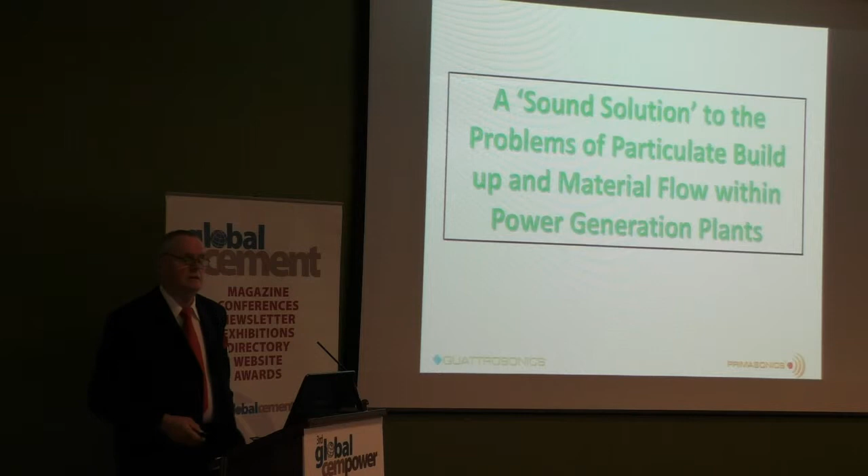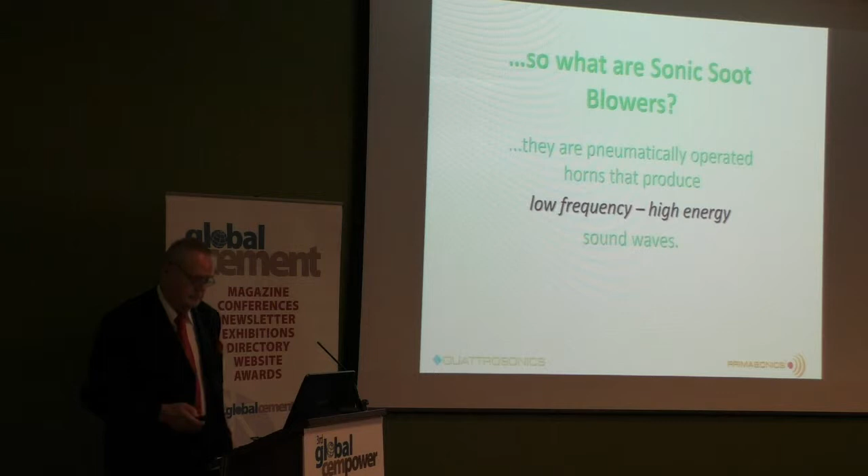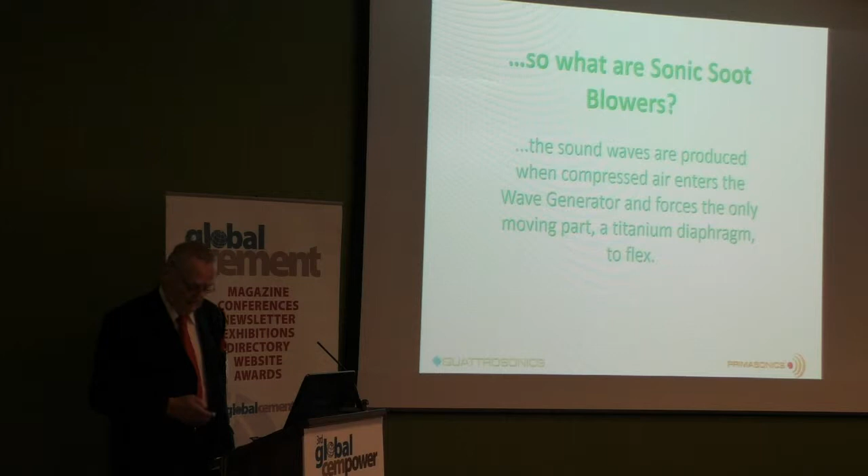My presentation is a sound solution to the problems of particulate build-up and material flow within power generation plants. So what are sonic soot blowers? They are pneumatically operated horns that produce low frequency, high energy sound waves. The sound waves are produced when compressed air enters the wave generator and forces the only moving part, the titanium diaphragm, to flex. Here is a typical sonic soot blower.

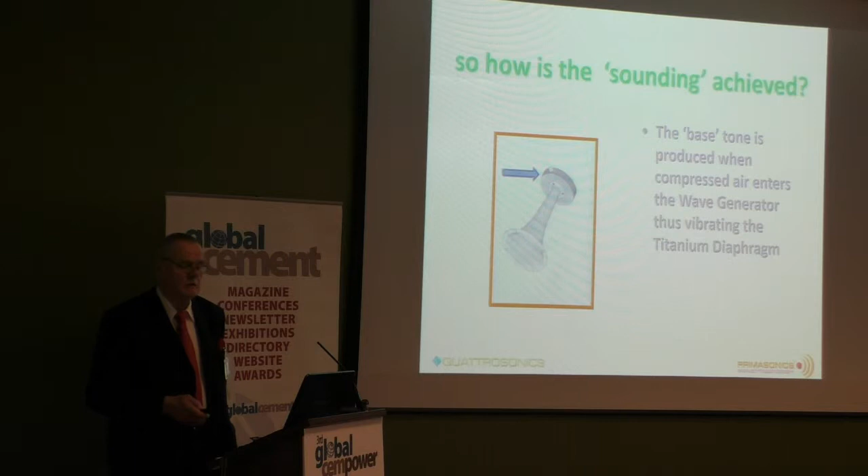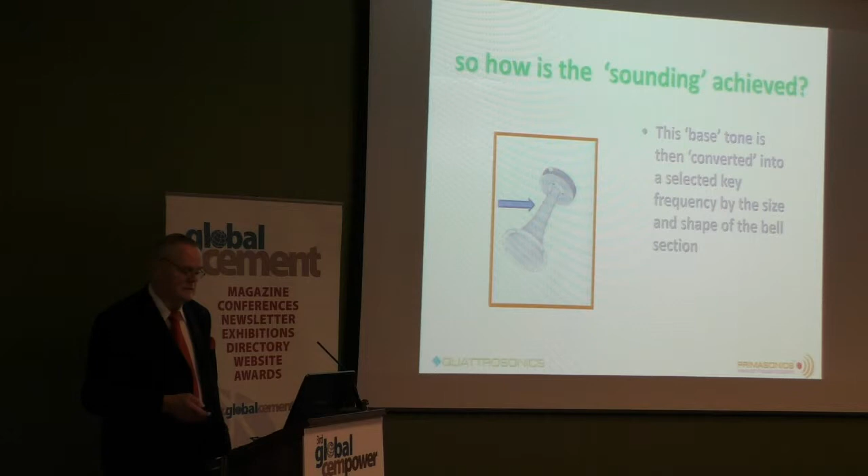The bass tone is produced when compressed air enters a wave generator, causing the titanium diaphragm to flex. That creates a bass tone, and then this bass tone is converted into a number of selected key frequencies by the size and shape of the bell section.

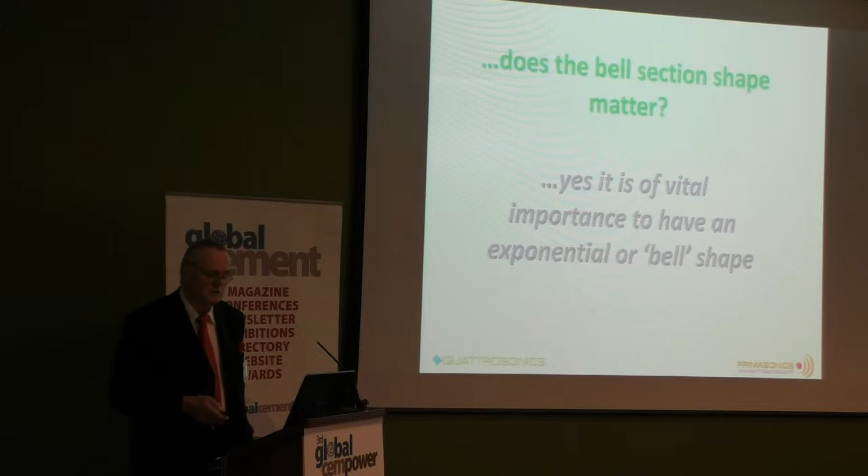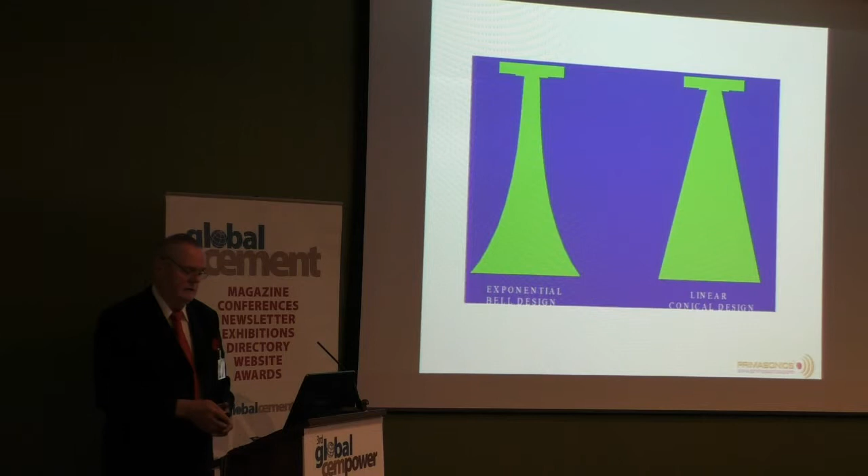Does the shape of the bell section matter? Well, yes, it is of vital importance to have an exponential or bell shape. On the right, you see an easier, simpler, cheaper, linear, conical design. If sound waves were to be emitted from this, they would be emitted as a parallel beam. If you have the exponential shape on the left, they are emitted in a cyclonic effect, giving much better coverage inside the vessel. So what do they do?

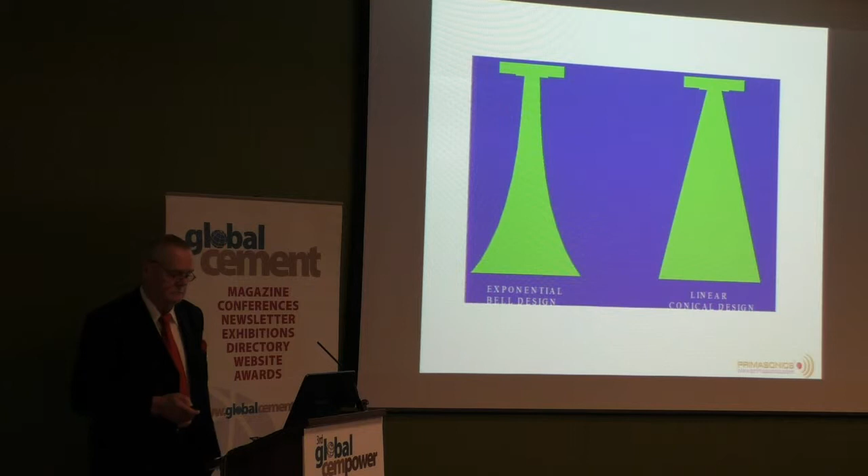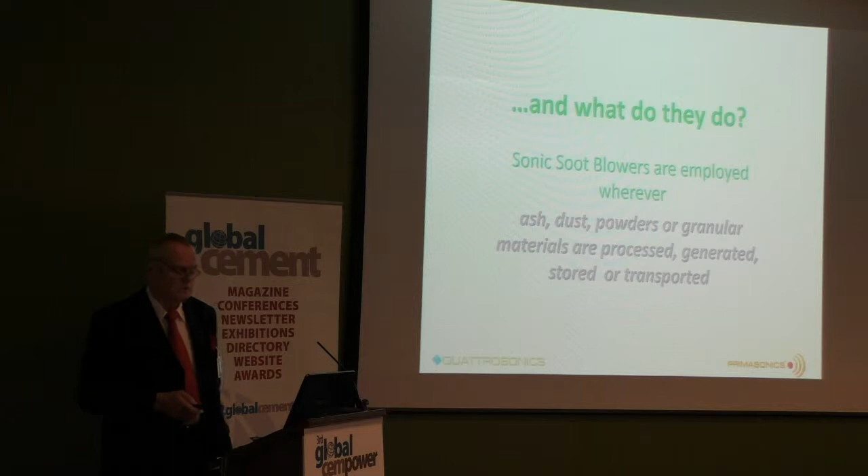Sonic soot blowers are employed wherever ash, dust, powders, or granular materials are processed, generated, stored, or transported.

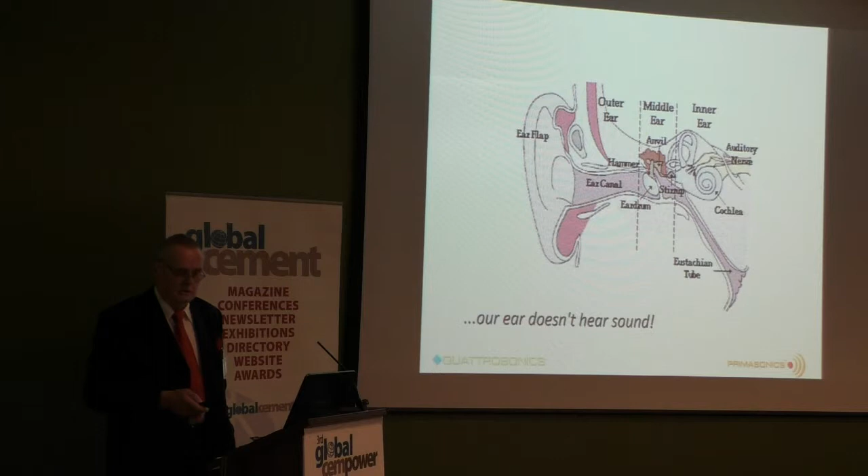To understand a little bit more about sonic soot blowers, first of all we have to understand what is sound. You may be amused or concerned to know that our ear doesn't actually hear sound. Our ear is a pressure-sensitive mechanism that detects very rapid pressure fluctuations. That is why when we fly or swim underwater, our ears go pop - they're detecting very rapid pressure fluctuations.

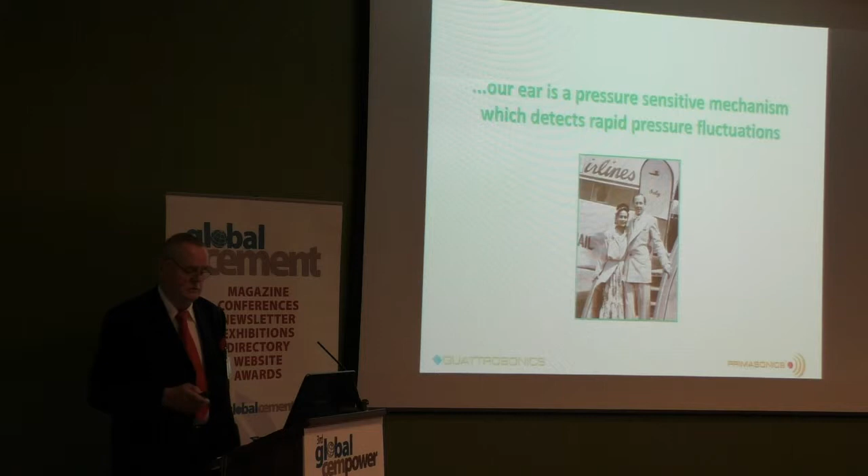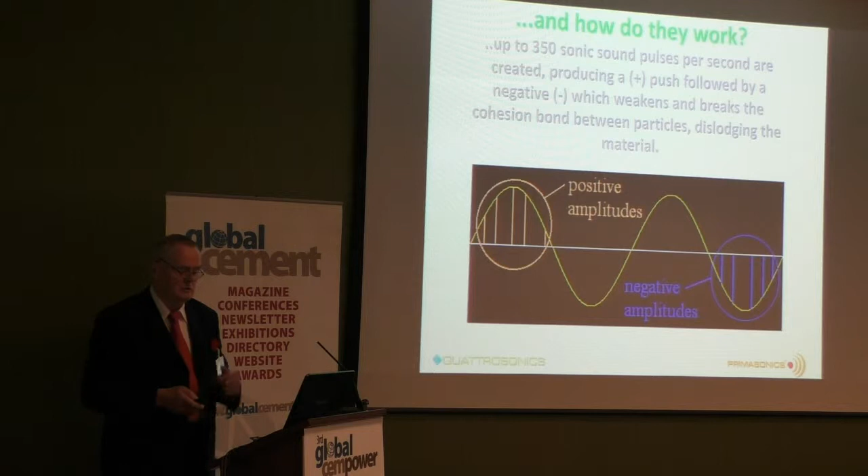That is exactly what is produced by a sonic soot blower - a range of very rapid pressure fluctuations. If you look at the next diagram, you will see that in a 350 Hertz sonic soot blower, there are 350 sound pulses per second. This creates a positive push followed by a negative, which weakens and breaks the cohesion bonds between the particles, dislodging the material. So it's a very rapid push-pull. Here's a typical sonic soot blower waveform.

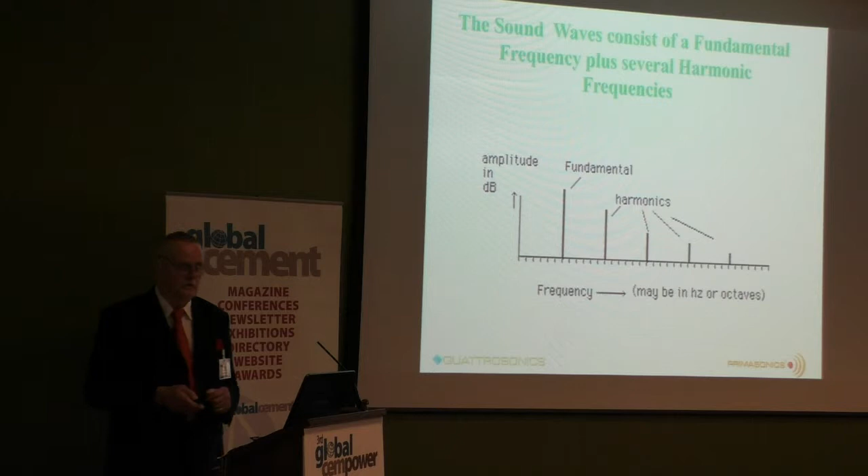Sonic soot blowers, although we direct them towards a particular fundamental frequency which we want to achieve, also produce harmonics - like in a piano, you play middle C, you go up an octave, you play the next highest C. So let's say the fundamental range you want here is 100 Hertz, you'll also get harmonics happening at 200 Hertz, 300 Hertz, etc.

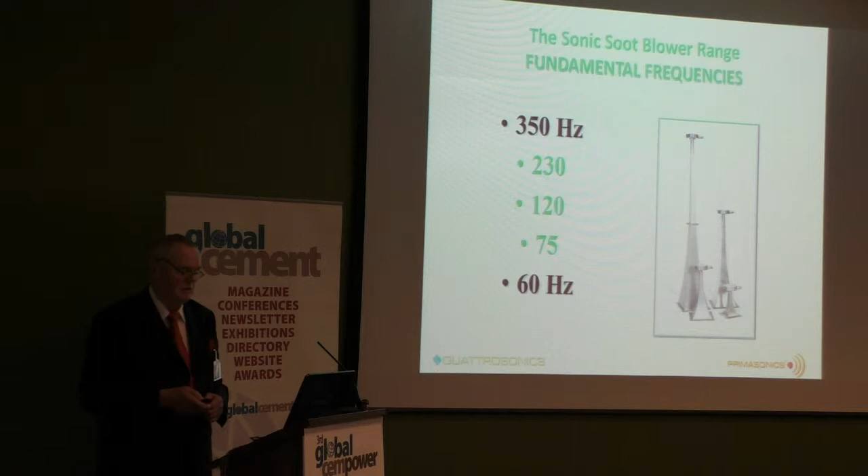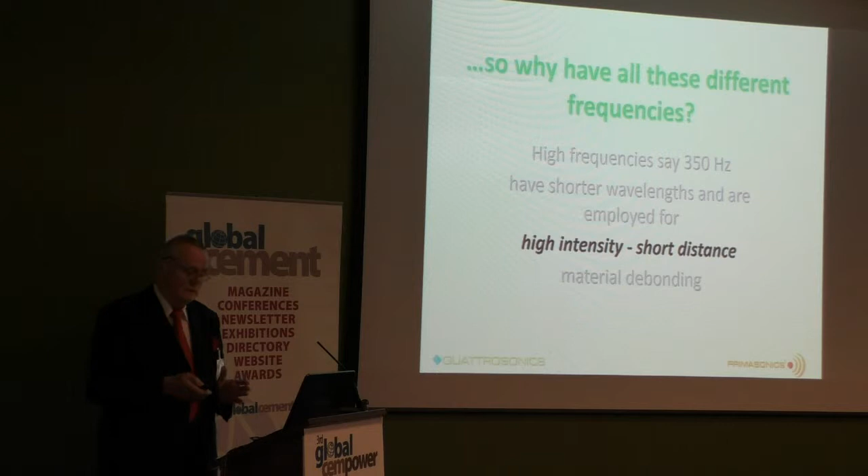With our long experience, we use the following frequencies to cover the wide range of applications. We go from 350 Hertz through 230, 120, 75, up to 60 Hertz. So why do we have all these different frequencies? High frequencies such as 350 Hertz have the same power but shorter wavelengths, and are used for high intensity, short distance material debonding. For example, if you have a silo with a hopper and the hopper is bridging, we would use a higher frequency device because that acoustic power we want used over 1, 2, 3 meters.

The opposite is true as well. The low frequency, for example 60 Hertz, has longer wavelengths and is employed for high power, long distance material debonding. Again, taking a silo as an example, if there was sidewall material build-up, rat holing, let's say a 30,000 ton cement silo, we would install a 60 Hertz unit on top, and that would prevent this sidewall build-up. It's because the sound waves are very long and they will pass up and down that huge silo space.

I'm going to give you a little demonstration of the power of sound waves only.

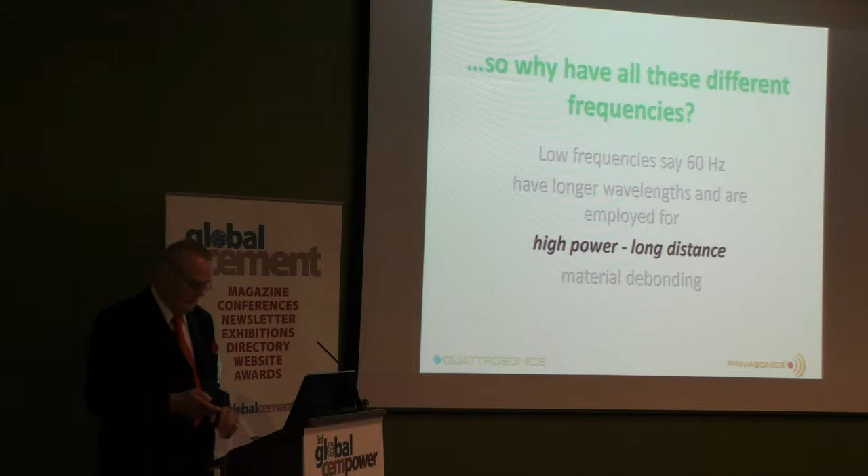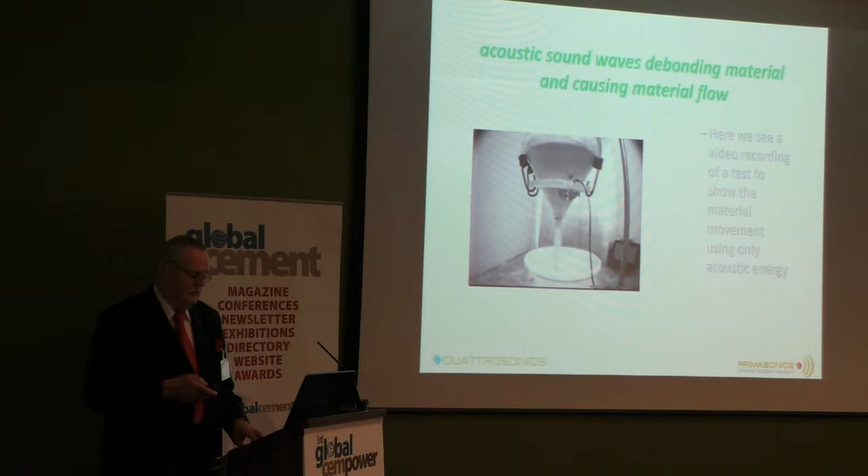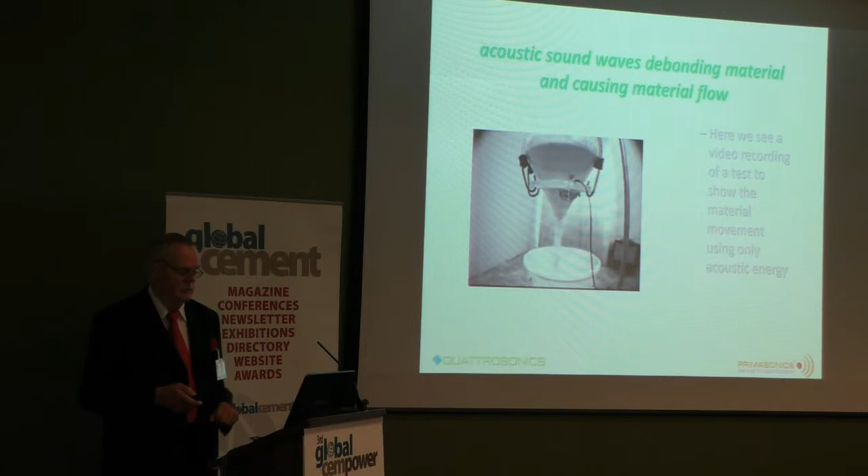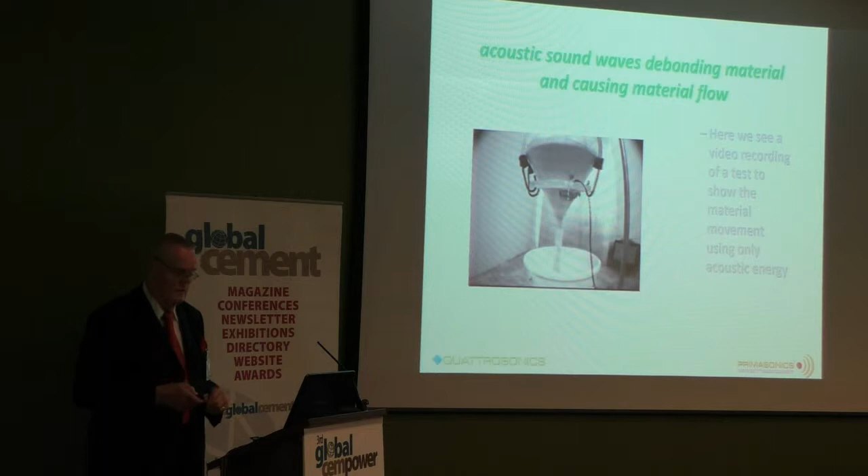We do a lot of research with the University of Liverpool on an ongoing basis. Here is a special room where we have an acoustic cleaner and a vessel, and no other outside influences. This is simply using sound waves - no vibration, nothing else - to make that material flow. Purely sound waves. We have accelerometers strapped on the side of the vessel to measure and prove that there is no vibration happening. A very, very powerful material debonding.

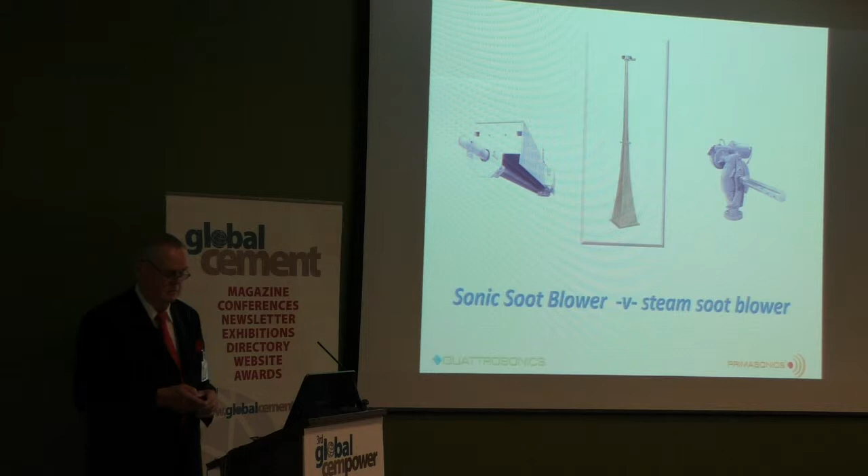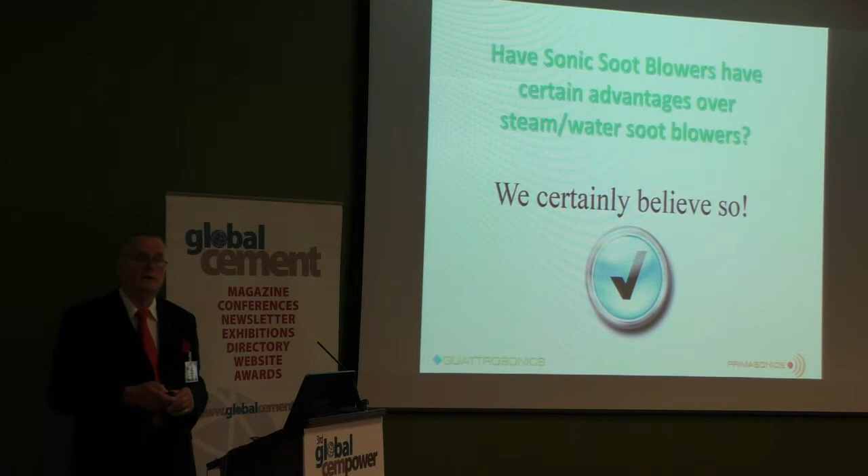One of the key areas we are involved in is the story of the tussle between sonic soot blowers and steam soot blowers. I'm sure many of you are familiar with steam soot blowers, even if you're not yet familiar with sonic soot blowers. So do sonic soot blowers have certain advantages over steam or water soot blowers? Well, we certainly believe so. If you look at a couple of the key areas - first of all, price, operating and maintenance costs - the sonic soot blower is cheaper to purchase and install.

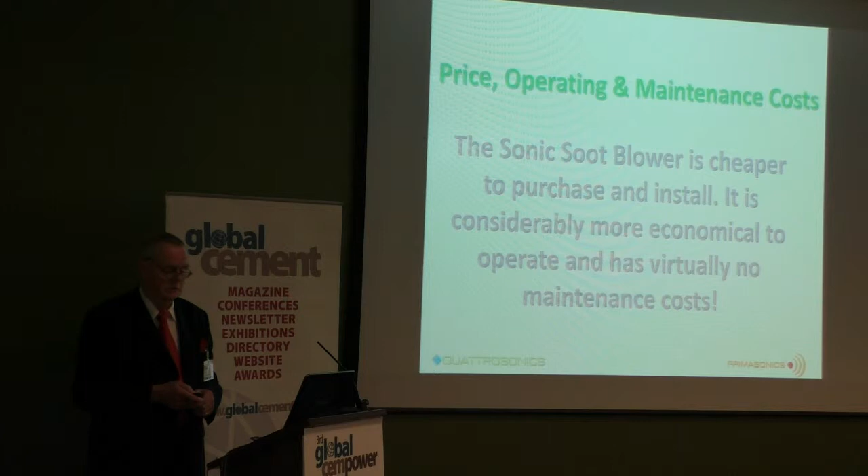It is considerably more economical to operate, with virtually no maintenance costs. Looking at physical damage, corrosion and erosion, the sonic soot blower will not cause any physical damage or vibration to tube bundles or structures. Because there's no steam or water involved, they will not cause any corrosion or erosion problems. So, no physical damage.

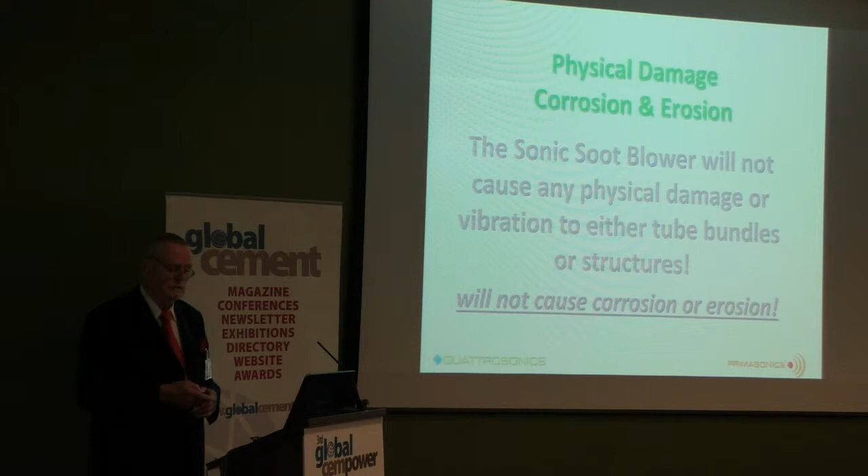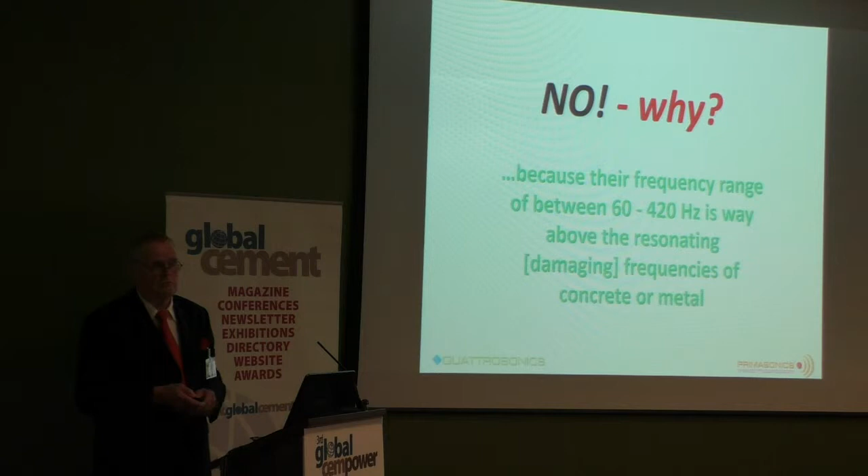Well, can we prove it? The reason is that we operate between 420 hertz and 60 hertz, which is way above the resonance frequencies of steel or concrete. You need to be down somewhere below 15 hertz to start getting into that area.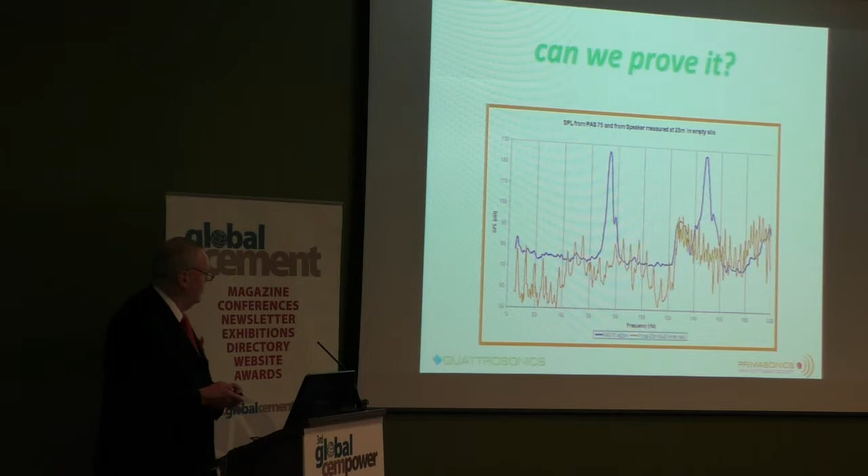Can we prove it? Yes, we can. Here's one example. Here we have a large silo, a concrete silo with a metal base. We installed a microphone halfway down the silo, a 75 hertz unit on top, and a couple of accelerometers on the wall of the silo and the hopper section, and we sounded the unit. Being a 75 hertz unit, its fundamental frequency appears at 75 hertz, and we have the harmonic at 150 hertz.

So all this powerful sonic debonding is going into the material. The orange line is the vibration picked up on the side of the silo or on the hopper. This could be a forklift truck driving by, a rotary seal, or a conveyor on the bottom of the silo - many reasons. But you will see that none of this powerful debonding sonic wave energy is being absorbed into the structure whatsoever. Totally, totally safe.

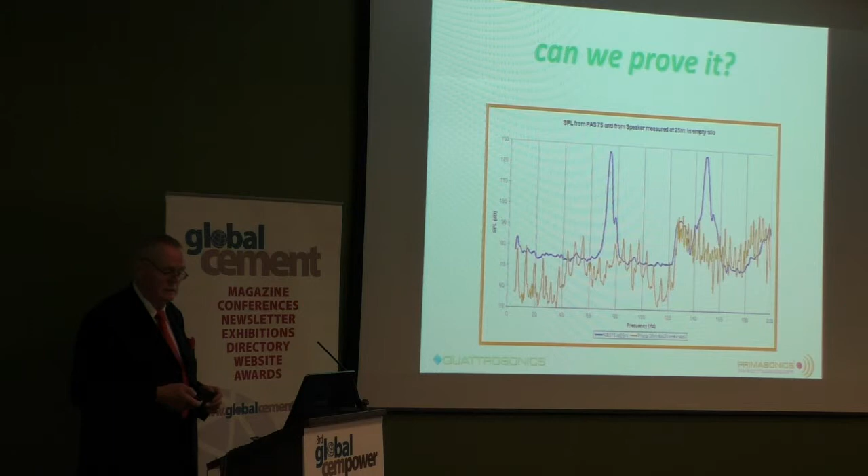Other interesting things about sonic sound waves: they travel at about 344 meters per second in air, faster through solids, and in 360 degrees. So unlike a steam soot blower, it's not just leading tube edge cleaning, but total tube cleaning.

One other important difference between steam soot blowers and sonic soot blowers is that sonic soot blowers actually prevent ash being deposited in the first place, rather than leaving it like a steam soot blower until the end of the shift when you're trying to blast a hard crust off the tubes. So by sounding a sonic soot blower typically for 5 to 10 seconds every 5 to 10 minutes, it prevents the ash from building up in the tubes.

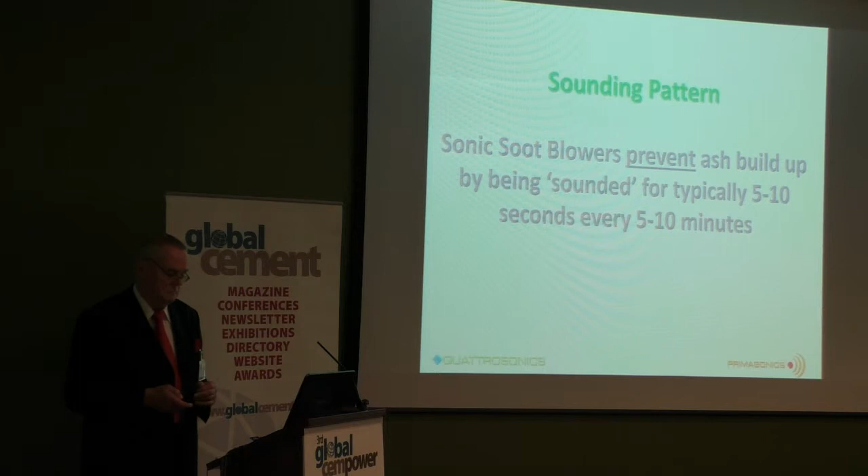So what is required to operate a sonic soot blower? Only two things: normal compressed air, 5 to 6 bar, using about 18 to 22 liters per second when sounding - but remember, it's only sounding for 5 to 6 seconds every 10 minutes or so - and electrical control voltage to activate the solenoid valve. This can be by a strapped-on timer, a plant PLC, or a local PLC.

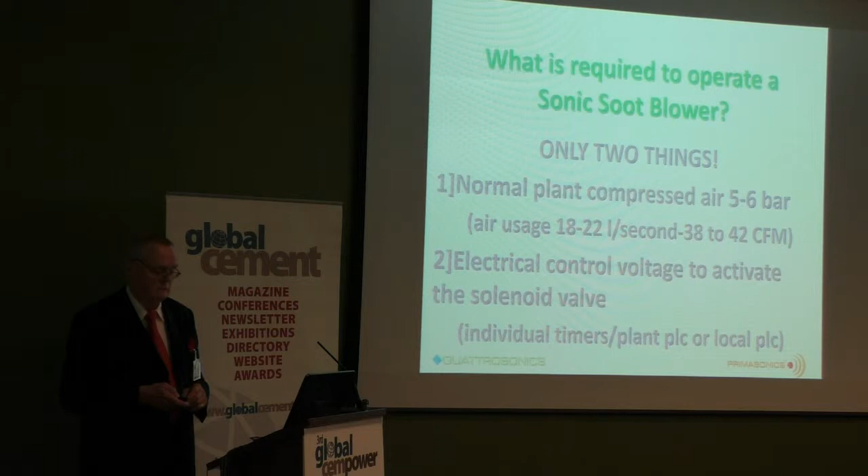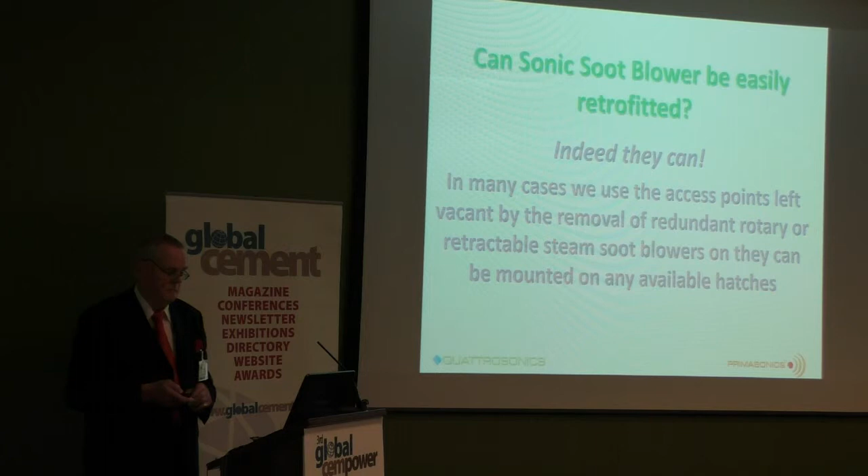One of the questions we're often asked: can sonic soot blowers be easily retrofitted? Well, indeed they can. In fact, a lot of our applications are doing that. We can use the vacant ports left by redundant steam soot blowers, or we can use any hopper or hatch in between the tube bundles, which is ideal for us. So, easy to retrofit. Let's look at a few examples.

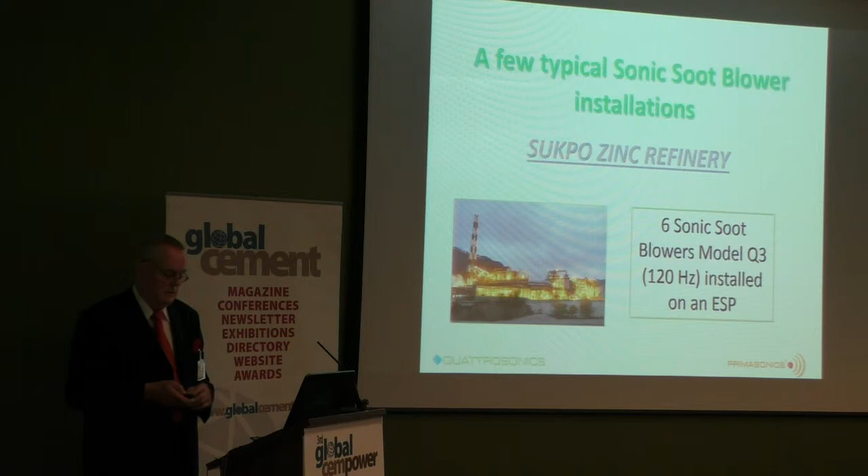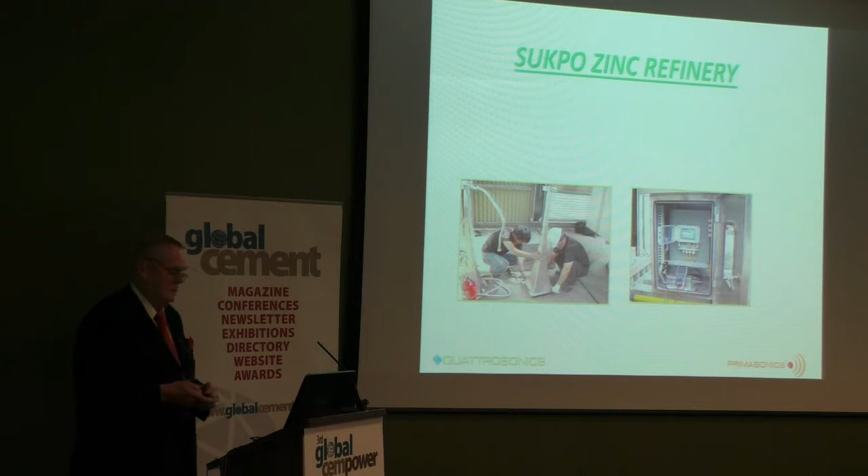This is a large zinc refinery where we installed six 120 hertz units on an ESP. The ESP had used a mechanical rapping system which was causing damage and inefficiency due to that damage. The photograph on the left shows the units being installed. On the right, we supply a dedicated PLC in a waterproof cabinet, and they have eliminated their rapping system.

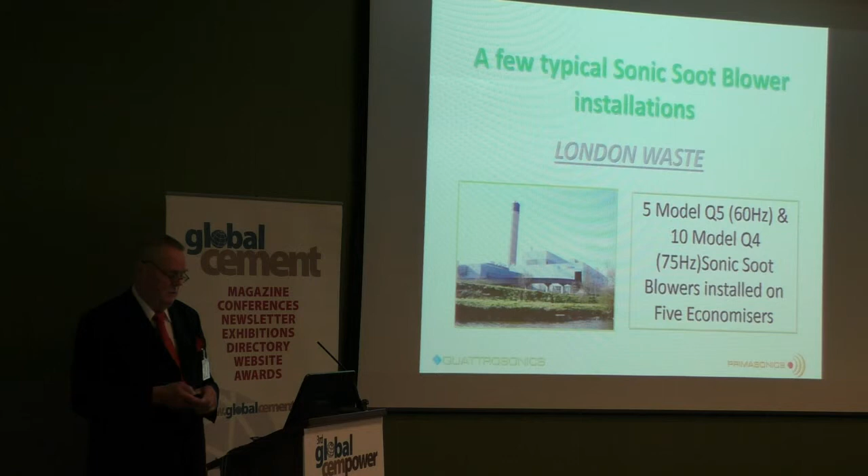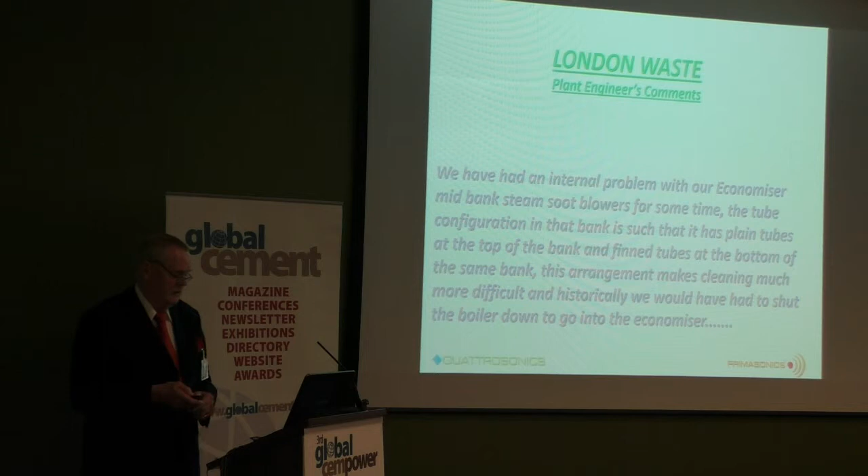Here are the comments of the plant engineer: 'We have had an internal problem with our economizer mid-bank steam soot blowers for some time. The tube configuration of that bank is such that it's plain tubes at the top of the bank and finned tubes at the bottom. This arrangement makes cleaning much more difficult, and historically we would have to shut down the boiler and go into the economizer soon after the development of such a fault in order to repair the steam soot blowers and manually clean the tube banks because of the rate of fouling being so high. However, currently draft losses have remained insignificant thanks to the operation of the sonic soot blowers. I would happily endorse your product.'

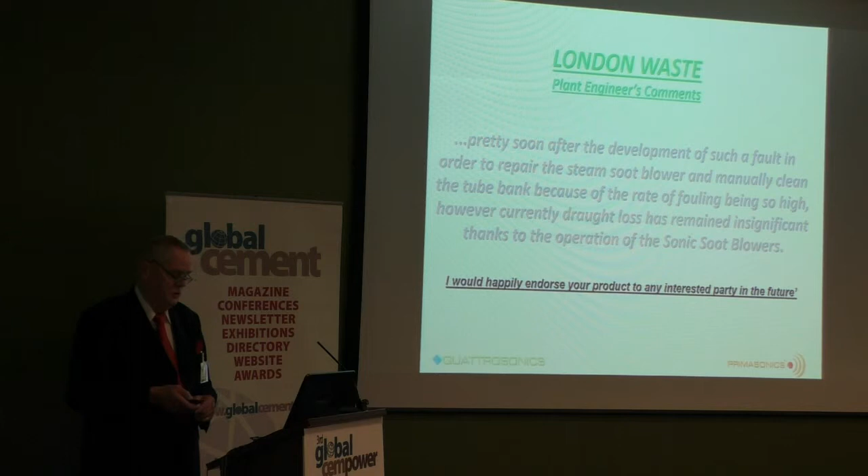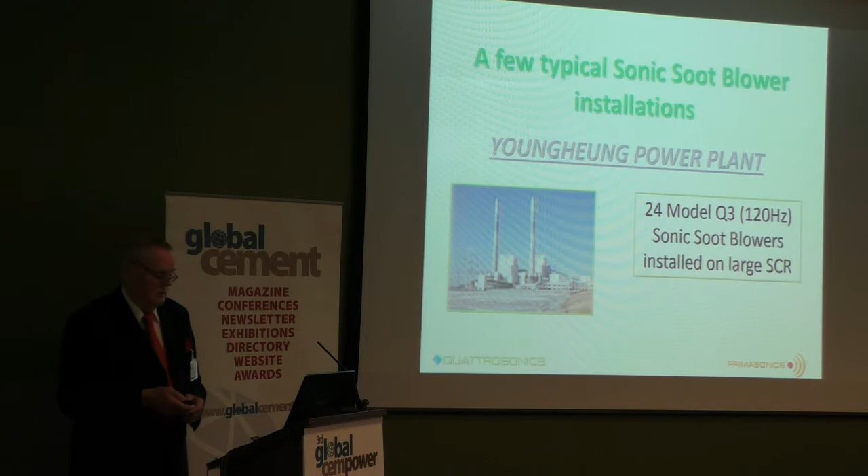Another large power plant, this time in South Korea, where we installed 24 120 hertz sonic soot blowers on a large SCR. This SCR initially had retractable steam soot blowers. You can see on the left one of the now redundant retractable steam soot blowers, beside that, one of the sonic soot blowers, and on the right, a close-up of one of the sonic soot blowers.

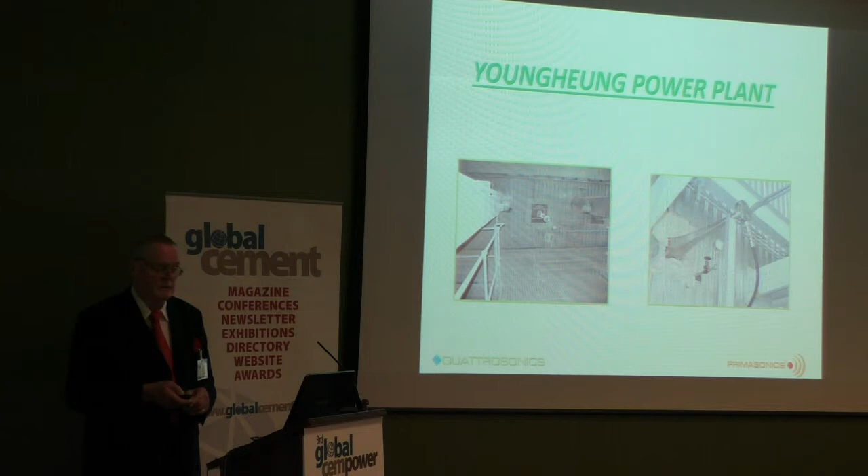They have an excellent testimonial of the efficiency of those units and the savings they have made in not trying to run their steam soot blowers and the high maintenance costs they suffered from trying to do that.

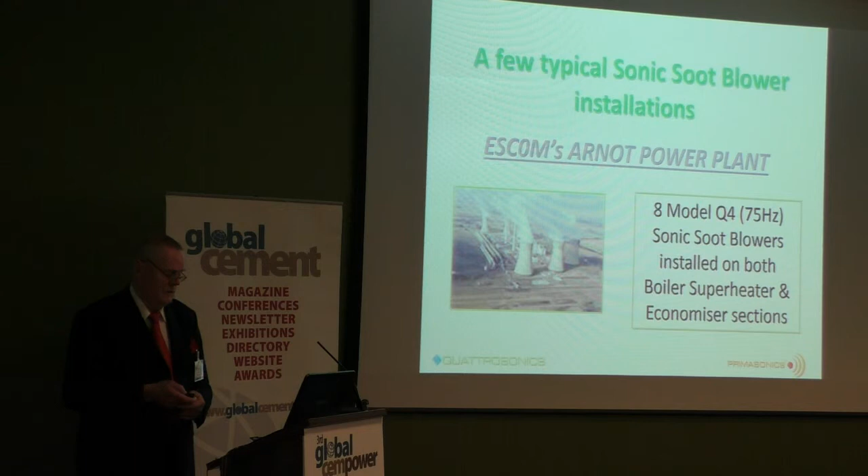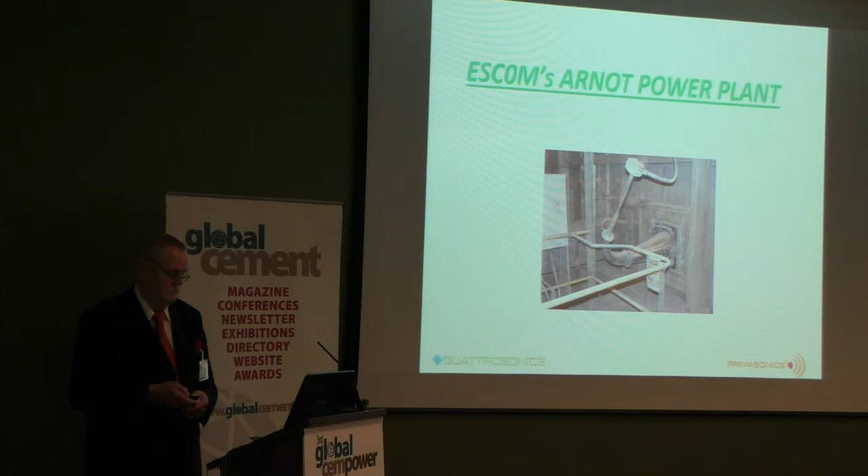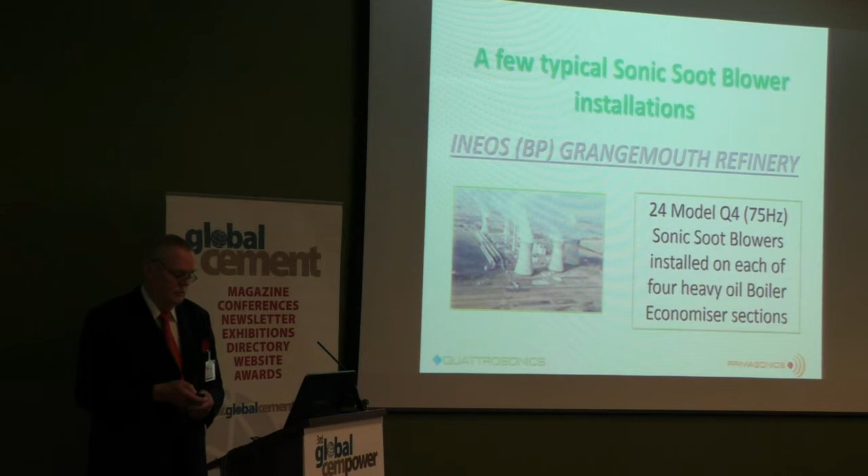You see it's fitted into an existing hatch between tube bundles, and that cured the problem. Closer to home in Scotland, this is a big refinery at Ineos, formerly BP, at Grangemouth. It had four heavy oil boilers, and we installed 24 75 hertz units in the economizer sections, which were causing them a lot of problems. So the sonic soot blowers replaced the rotary steam soot blowers.

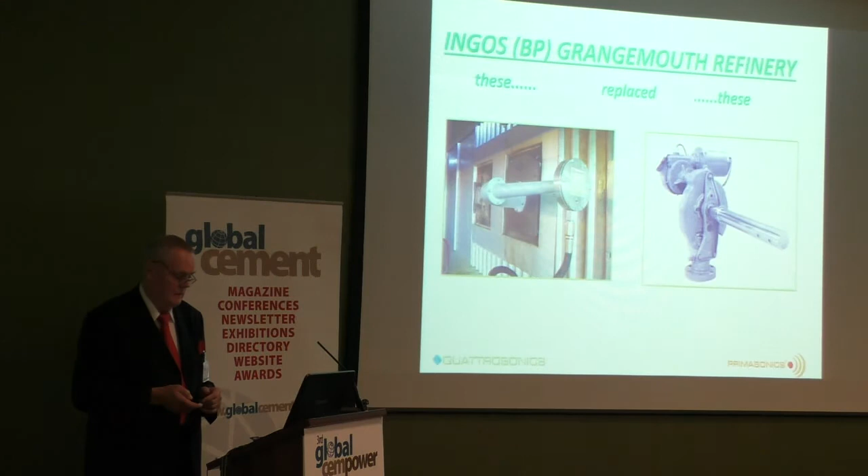So all areas within power generation within the cement plant we can deal with. But the cement plant is one of our biggest markets in any case, cement industry in general.

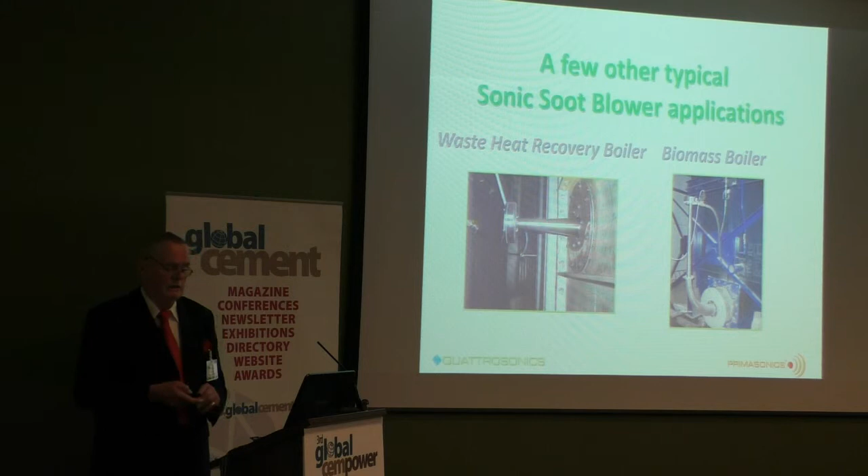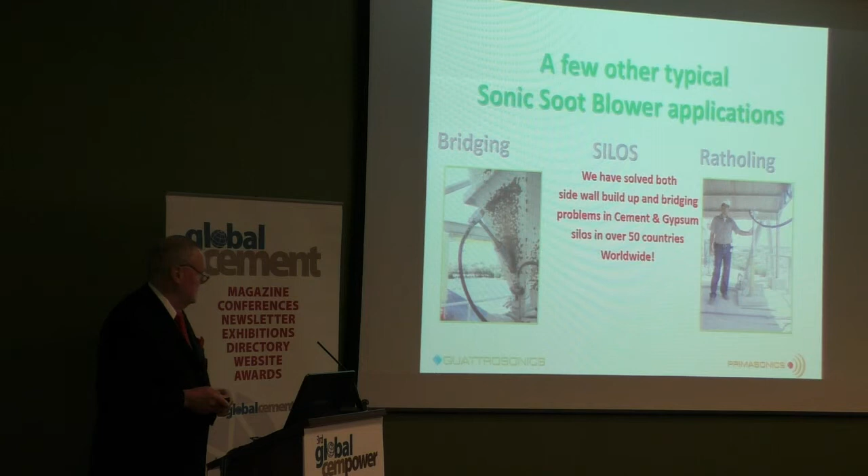On the right, this is a plant in Haiti. This guy, the plant manager, is so pleased at having installed acoustic cleaners on top of his unit that he wrote to me and said, here's a photograph of me, I recovered 1,000 tons of cement which I was able to sell, and my boss thinks I'm wonderful. So he's very pleased to have his photograph taken.

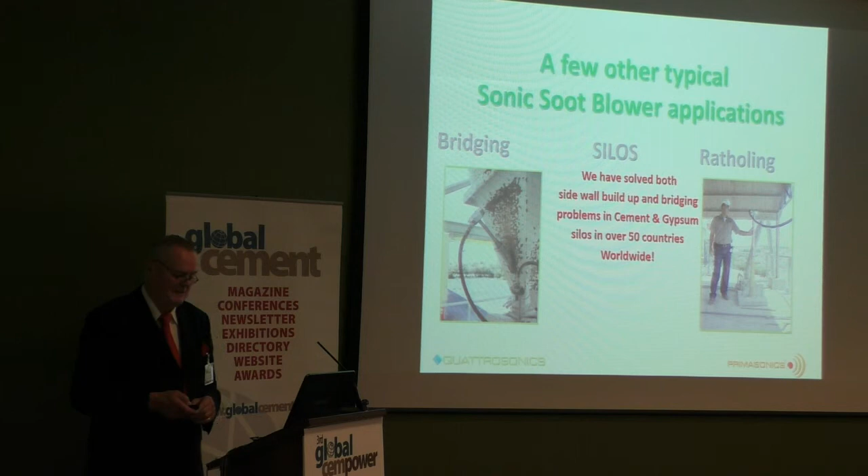Here's another demonstration of the power of a filter plant and the sonic soot blower inside it. This next slide I'm going to show you is in Turkey. It is a wood plant. This filter handles the fine wood dust.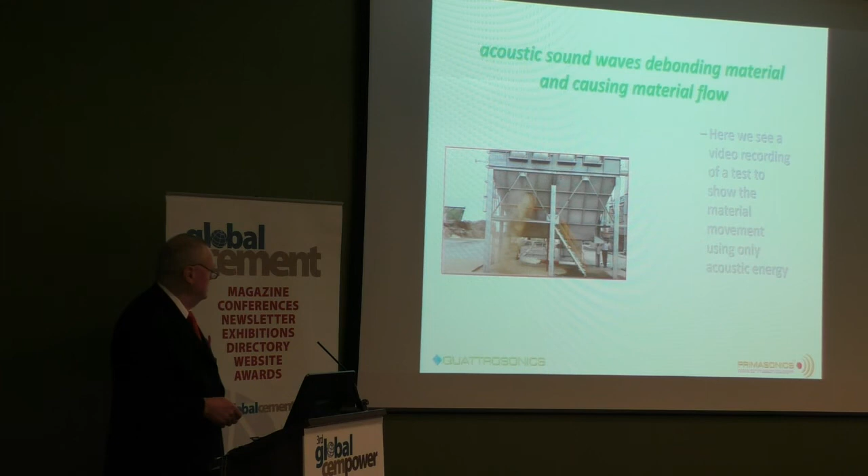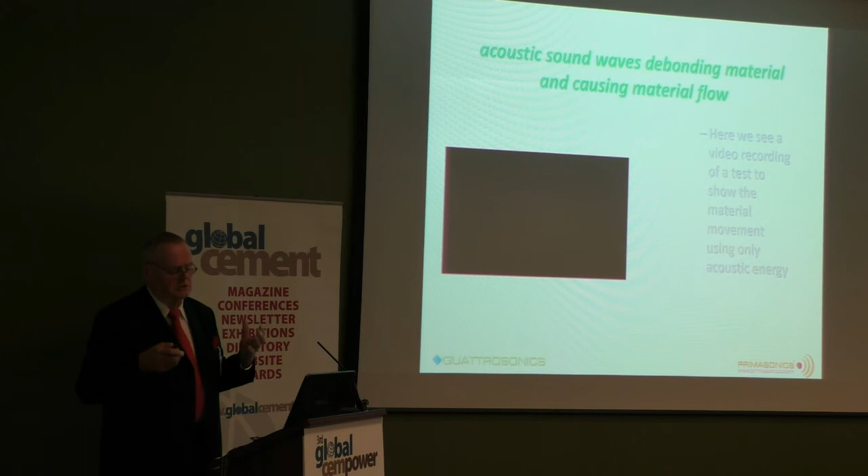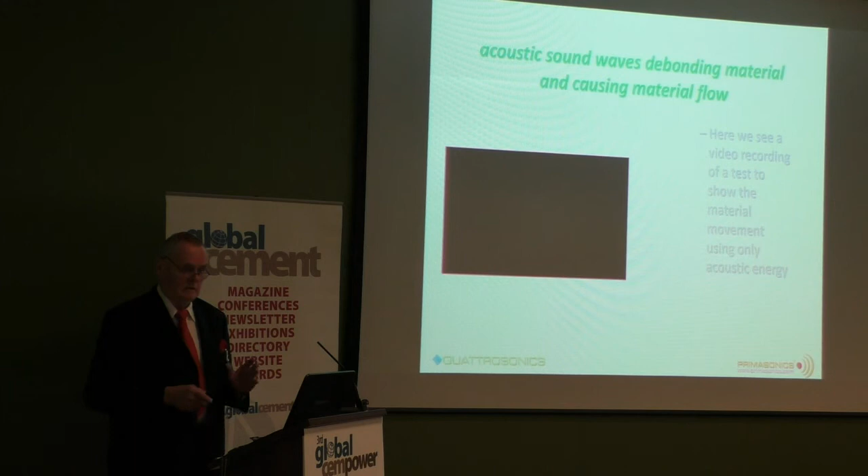They're excited. So it not only stops hopper pluggage, it cleans the inside walls, it cleans the bags, and it gives the filter bags extra life. We have customers who have got 50% more bag life by using this type of technology.

So those are just a few examples of not only the power industry, but other applications within the cement industry.

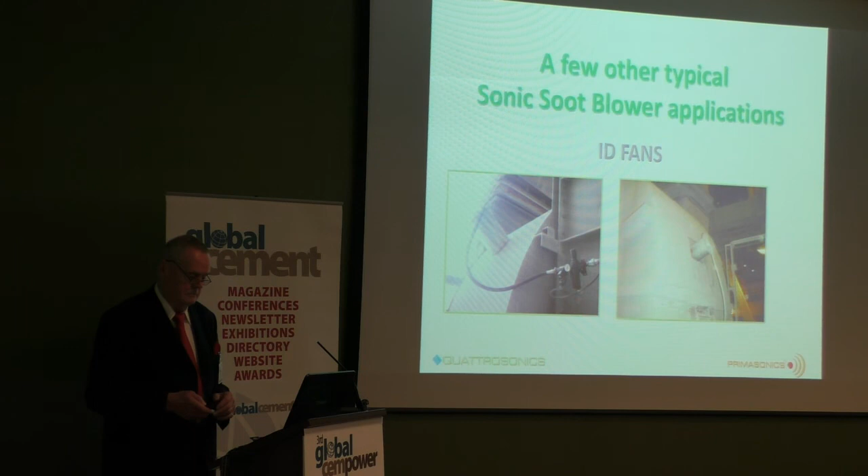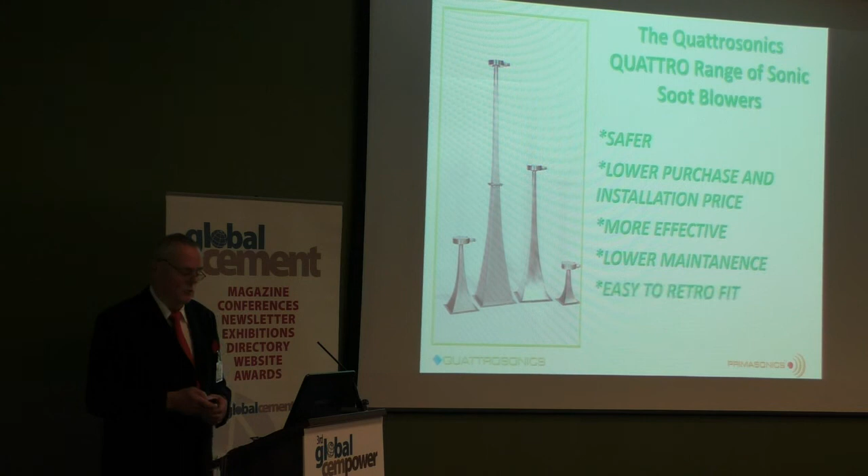So the Quattrosonics range of sonic soot blowers are safer, they have a lower purchase and installation price, they are more effective, with lower maintenance, easy to retrofit, and fully automatic.